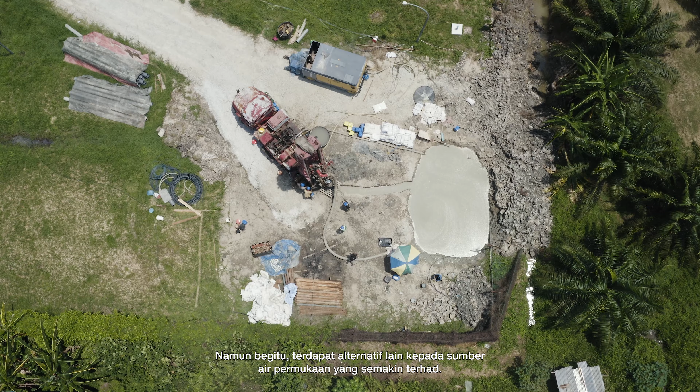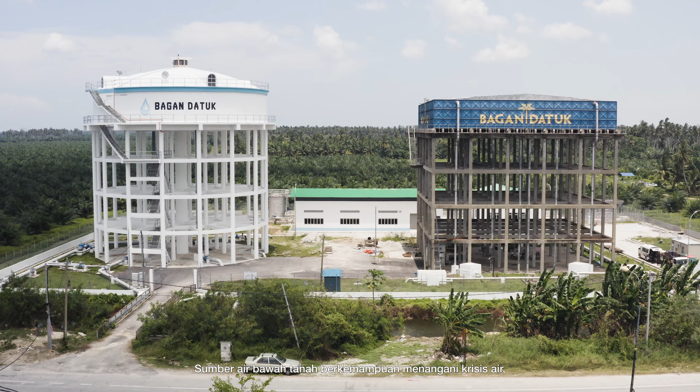There is, however, another viable alternative to surface water resources, and it may offer a practical solution for the supply of fresh water. Groundwater resources have the capability of addressing the water crisis, particularly for remote areas and close to the sea, where access to surface water sources may be economically and physically unfeasible.

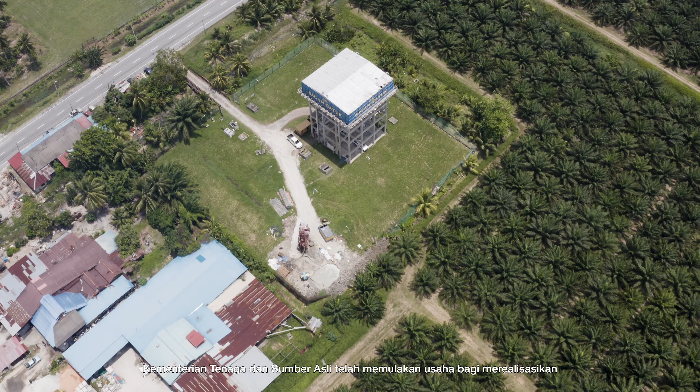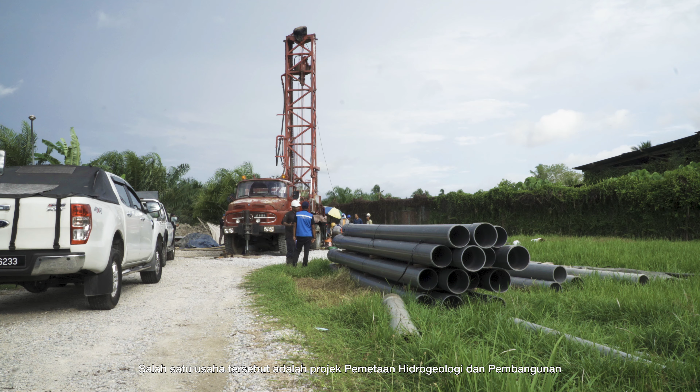Realizing that a comprehensive action plan would be needed to tackle this critical issue, the Ministry of Energy and Natural Resources embarked on a project to fully realize the potential of groundwater resources in selected states within Malaysia. One such endeavor is the Hydrogeology Mapping and Development of Groundwater Resources, or PAT project in the state of Perak.

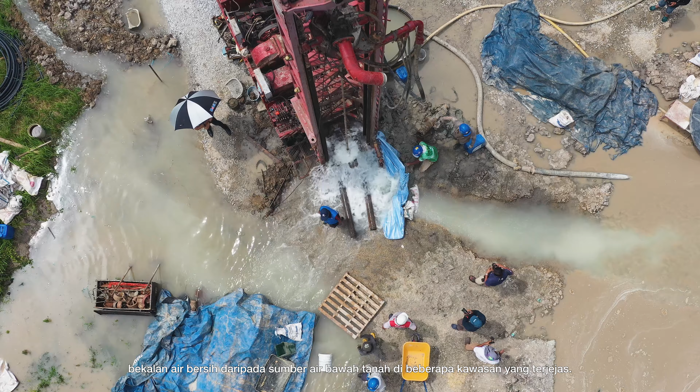Spearheaded by the Department of Mineral and Geoscience Malaysia Perak under the activity of hydrogeology of the Geoscience Unit, this project outlines the necessary strategies and steps in ensuring clean fresh water supply from groundwater resources in identified affected areas. This is the story of that journey.

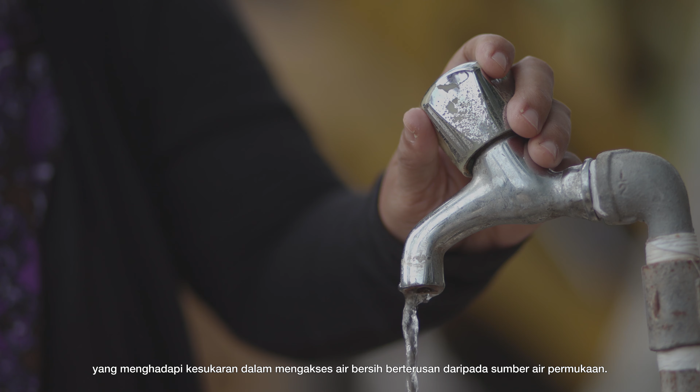As development and repurposing of natural resources expand over time, surface water sources have been depleting, while demand for treated fresh water has been steadily increasing. While Malaysia is blessed with an abundance of water resources, there are still some areas within the nation that have faced difficulties in accessibility to uninterrupted fresh water supply gleaned from surface water resources.

We do need to be prepared and not be overly dependent on surface water resources. We have seen disruptions to water supply due to contamination of our surface water resources. While we try to educate the nation in understanding the need to conserve and preserve water consumption, we need a contingency plan if and when we are faced with a large-scale water crisis.

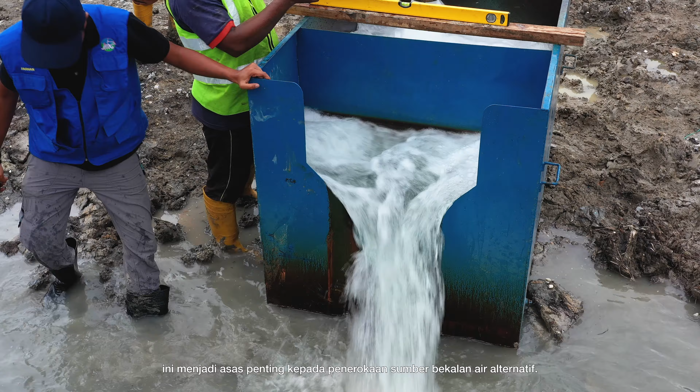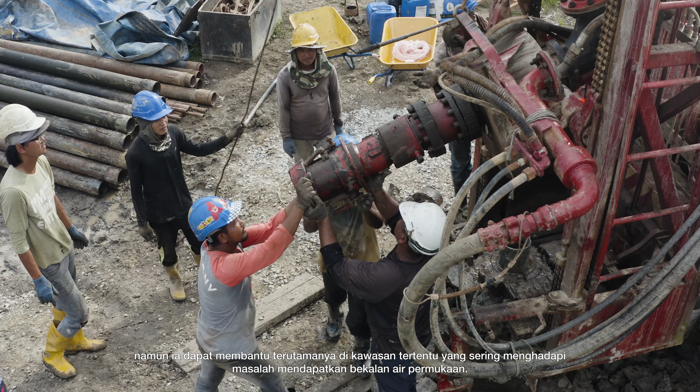Given the fact that in the year 2017, Malaysia has approximately 5 trillion cubic meters of groundwater resources, it makes perfect sense to delve into this alternate source of water supply. While the development of groundwater resources may never supplant surface water resources, it can very well be a supplement to the main water supply, especially in certain areas where the supply of water from surface resources may be intermittent and problematic.

Groundwater is less susceptible to contamination by pollutants, unlike surface water resources. Coupled with the fact that there are areas here in Perak that have inadequate or unreliable surface water resources, it is high time that the groundwater resources be fully tapped.

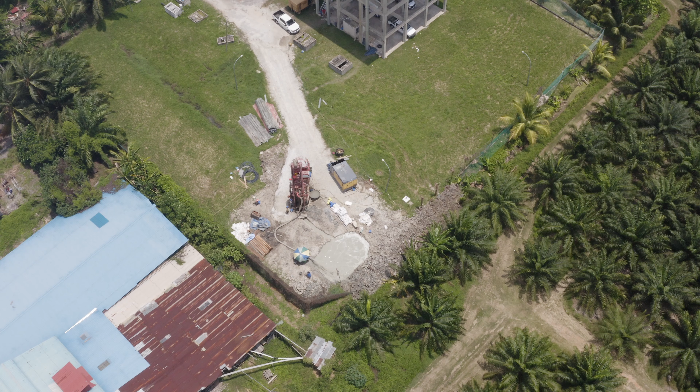Groundwater resources are a feasible alternative water supply source in remote areas, localities where there is no treated water supply, areas with frequent water disruptions, new settlement areas, and areas which are prone to peat fires. Groundwater is also suitable as a stopgap supply during emergencies and may be utilized for agriculture, aquaculture, and industrial purposes.

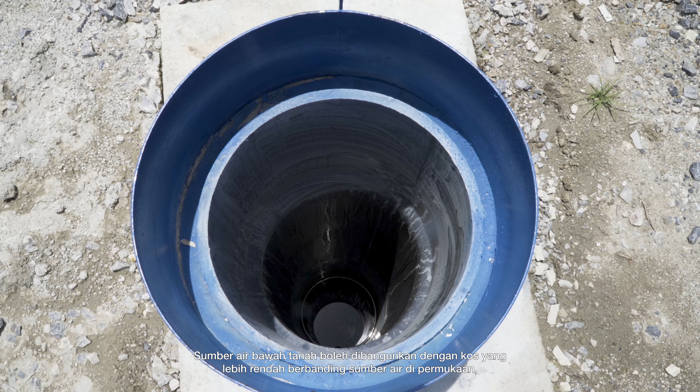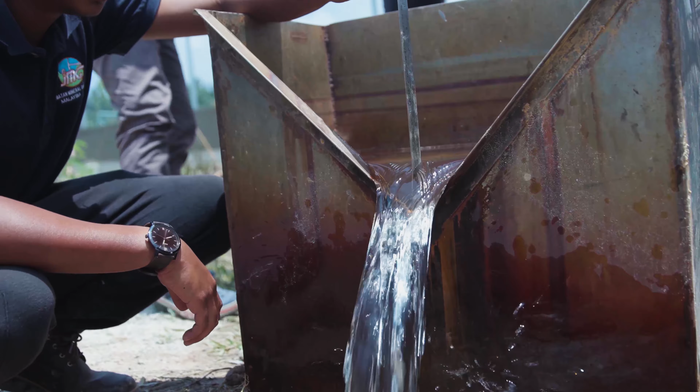Groundwater resources can be developed at a relatively lower cost than surface water resources, especially when developed in a strategic and localized small scale. It is with this aim in mind that the Department of Mineral and Geoscience Malaysia embarked on a strategic action plan focused in the state of Perak, particularly within the district of Bagan Datuk, where the perennial issues of low water pressure and peak time water shortages have become a bane that needed both intervention and sustained mitigation.

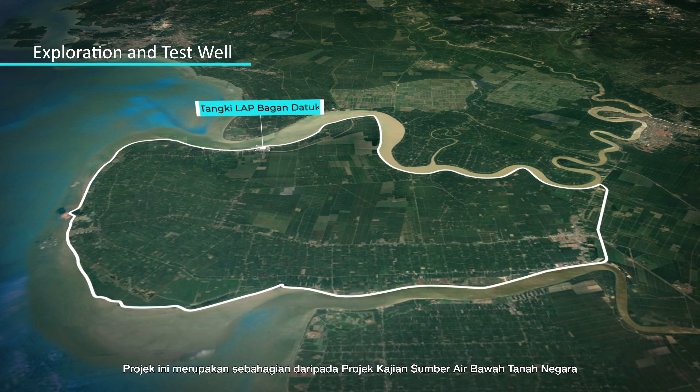Addressing the issue at hand and identifying the problem as well as the panacea, the Department of Mineral and Geoscience Malaysia drafted the Hydrogeology Mapping and Development of Groundwater Resources in Perak proposal, tabled and subsequently approved with a project budget of 12.5 million ringgit under the 11th Malaysia Plan. This project is part of and a sub-project of the National Groundwater Resources Study Project under the auspices of the Ministry of Energy and Natural Resources.

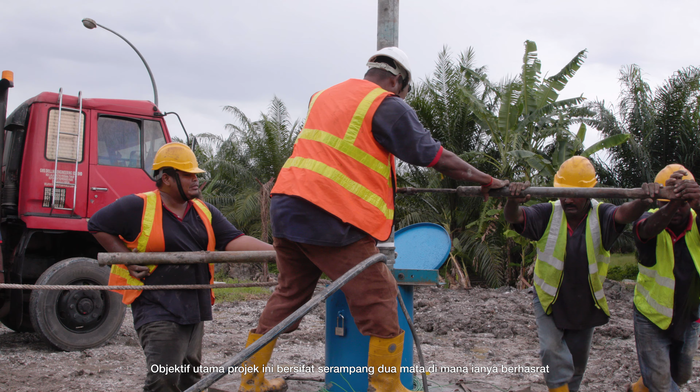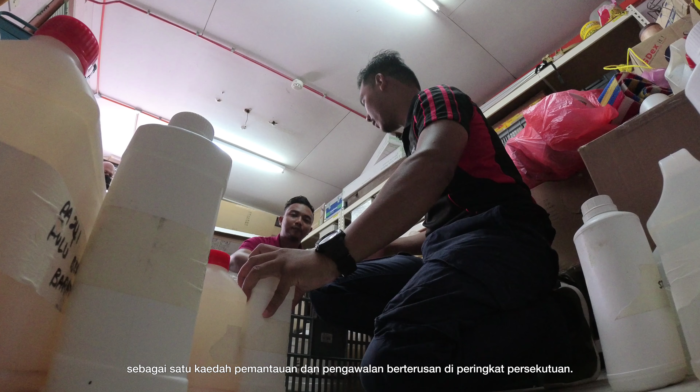The overarching objective of this project is two-pronged, where it was the intention to innovatively provide immediate clean water supply to problematic areas, especially within Bagan Datuk, and subsequently update the National Groundwater Resource Inventory as a means of perpetual monitoring and controlling measures at the federal level.

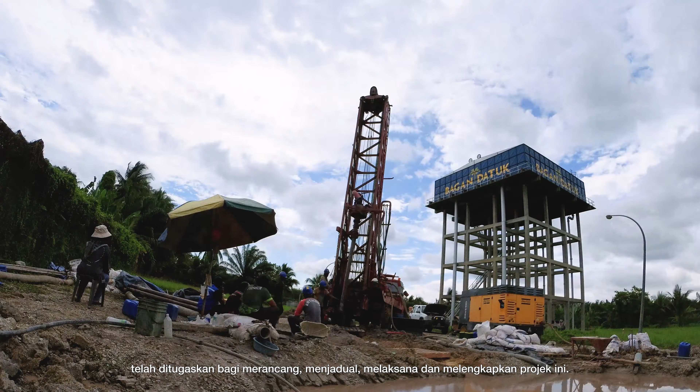The hydrogeology activities under the Geoscience Unit at the Department of Mineral and Geoscience Malaysia Perak was tasked with the planning, scheduling, execution and completion of this project. The scope of the project entailed hydrogeology mapping studies in establishing baseline parameters and the hydrogeological properties of groundwater aquifer systems within the identified problem areas of Bagan Datuk, Rungkup, Selekoh, Teluk Baru and Hutan Melintang in the state of Perak, incorporating geophysical approaches in determining groundwater potential in the Bagan Datuk district,

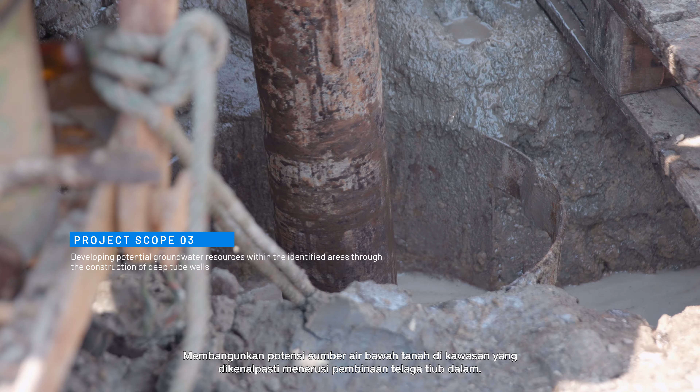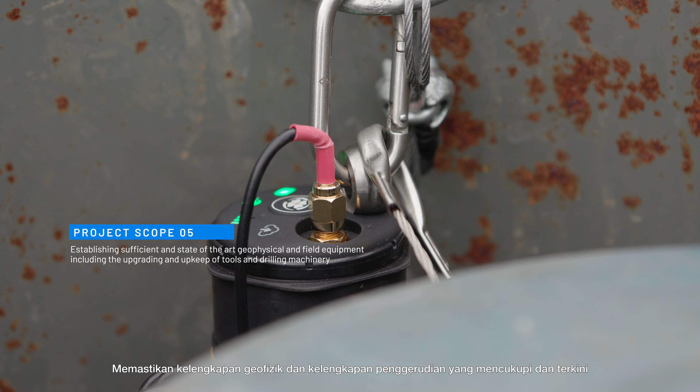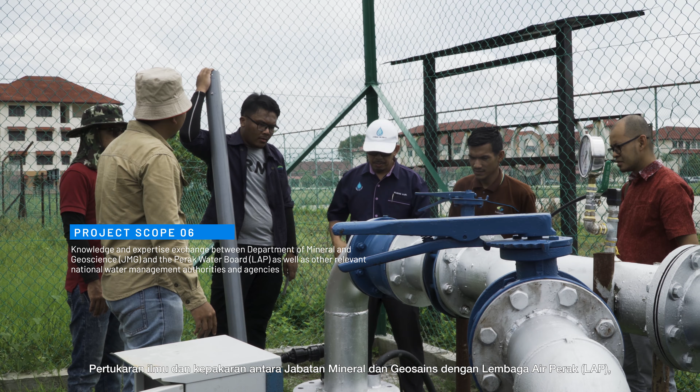developing potential groundwater resources within the identified areas through the construction of deep tube wells, infusing the use of project management practices as well as information and communication technology, ICT, to establish effective hydrogeological mapping data storage, management and processing systems, establishing sufficient and state-of-the-art geophysical and field equipment, including the upgrading and upkeep of tools and drilling machinery. Knowledge and expertise exchange between the Department of Mineral and Geoscience and the Perak Water Board LAP, as well as other relevant national water management authorities and agencies.

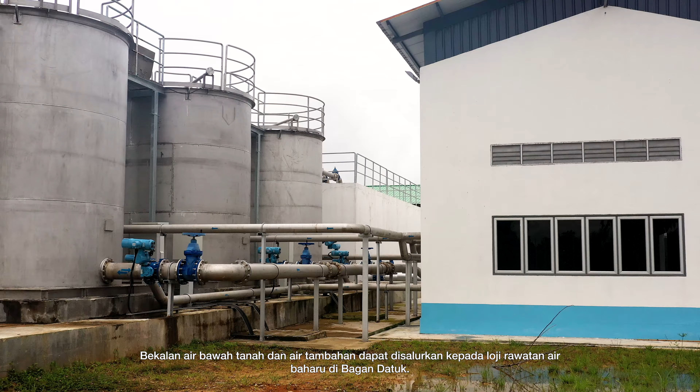Armed with financial support of the government and a clear project premise, this undertaking hopes to ensure groundwater and additional water supply to new water treatment plants in Bagan Datuk, increase in water pressure capacities in affected areas by virtue of water supply from deep tube wells, undisrupted clean water supply to 70,000 end users during drought seasons and peak usage during festivities. This project utilized all the expertise of our departments in identifying affected areas, establishing both the potential and capacity of groundwater resources by way of hydrogeological measure, and more importantly, ensuring a sustained and uninterrupted supply of water to those who are in dire need.

In order to ensure the groundwater exploration meets the requirement and its standard, proper and systematic planning is a major key to execute the exploration process. The groundwork, which involves the desktop fact-finding and data collection, is most crucial. We had to do in-depth research on the initial data of topography, geology, hydrogeology information, and access and facility of the research area. Groundwater exploration is a very unique process. The success in groundwater targeting lies in experience of understanding the geological conditions, structural conditions, and hydrogeological conditions which favor the occurrence of groundwater.

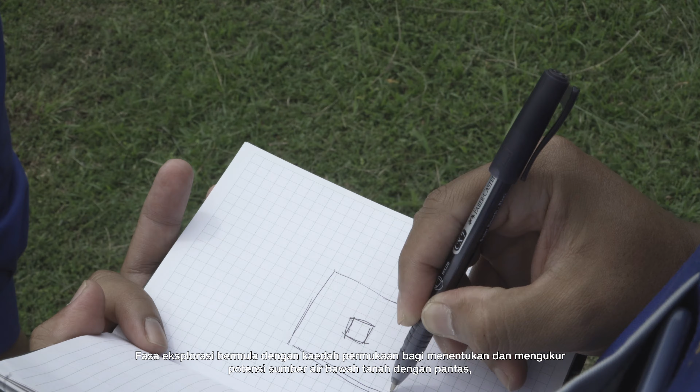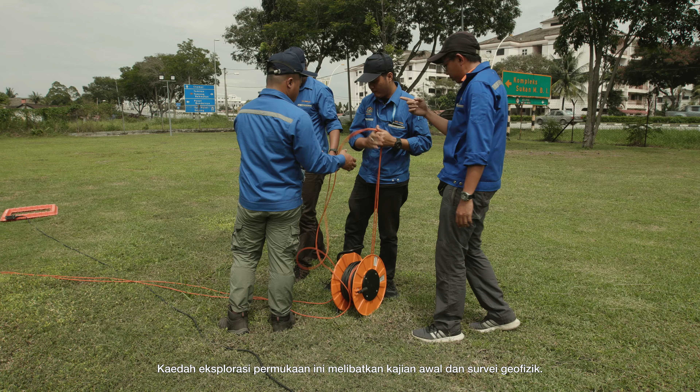As it is a hidden resource, it requires techniques classified as surface exploration and subsurface exploration methods. These methods are employed to target the groundwater potential zones. Identifying the location of its availability is a challenging task for the hydrogeologist, which requires basic understanding of its position in the subsurface geological setup. The exploration phase began with surface methods, which determine and gauge the potential of groundwater at a fast speed, covering a large area with a cost-saving solution. These surface explorations involve preliminary research investigation and geophysics survey.

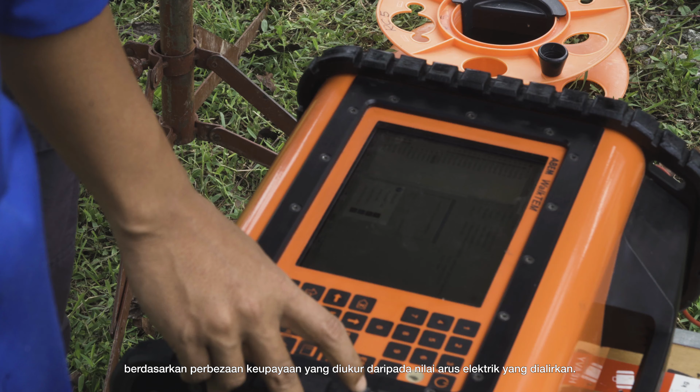The geophysics surveys carried out in this project are two-dimension electrical resistivity and transient electromagnetic method. The two-dimension electrical resistivity involves measuring the resistivity value of soil and earth material based on potential difference measured and value of flowing electrical current, while the transient electromagnetic method measures the conductivity of differently layered materials. Once the surface methods identified that there will be an adequate quantity of good quality groundwater, the drilling process takes place.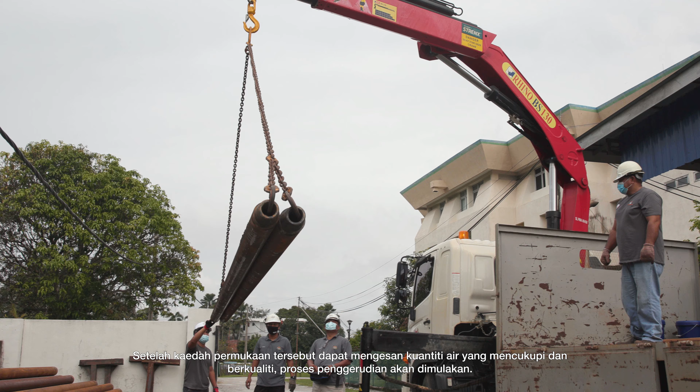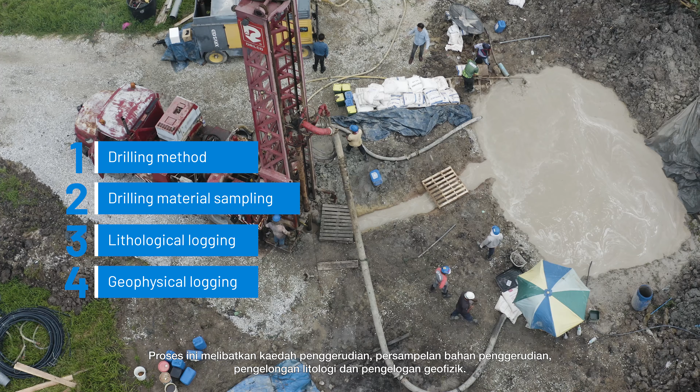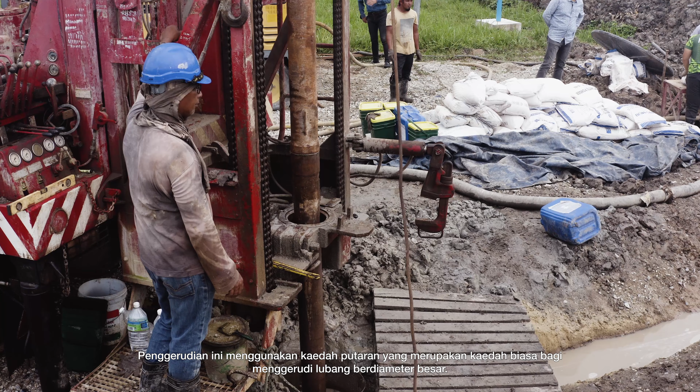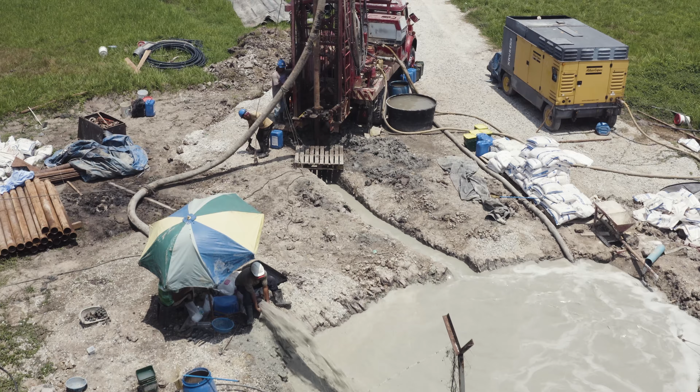This process involves drilling method, drilling material sampling, lithological logging, and geophysical logging. In this project, the deep drilling method is used. This method can achieve hundreds of meters of depth in large diameters. This drilling uses rotary methods, which are the common drilling techniques used to drill large diameter holes. The drilling techniques used in this method are mud rotary and reverse circulation. Mud rotary uses drilling mud that lifts pieces of cut samples upwards while halting the drilling hole from collapsing and cooling the drill bit itself. This technique is best used on unconsolidated layers.

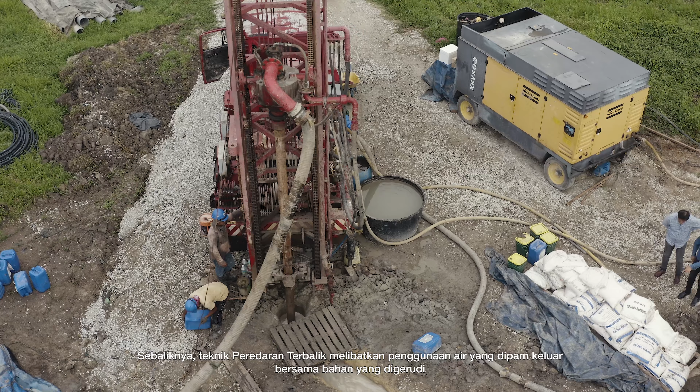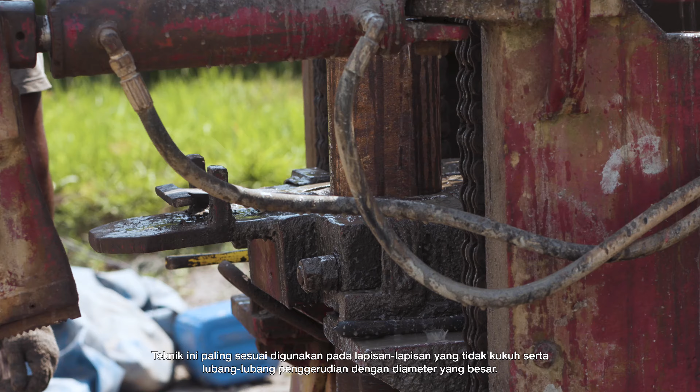On the other hand, the reverse circulation technique involves the usage of water being pumped upwards alongside the drill materials through the drilling pipe and then discharged into pits. Water and drilling mud inside the pit will then be put back into the drilling hole. Water level in the drilling hole and the pits must always be at the same level. This technique is best used on unconsolidated layers and drilling holes of large diameter. This operation requires a significant amount of water.

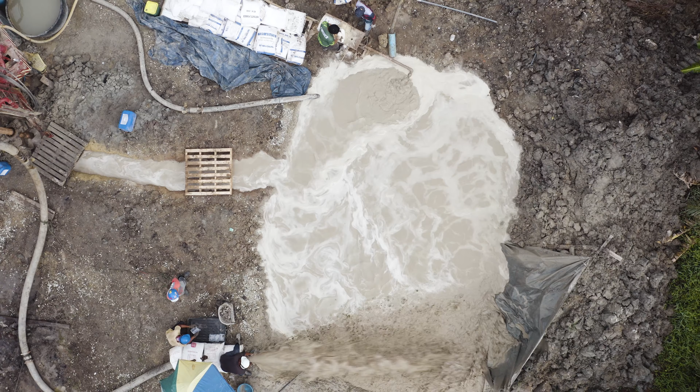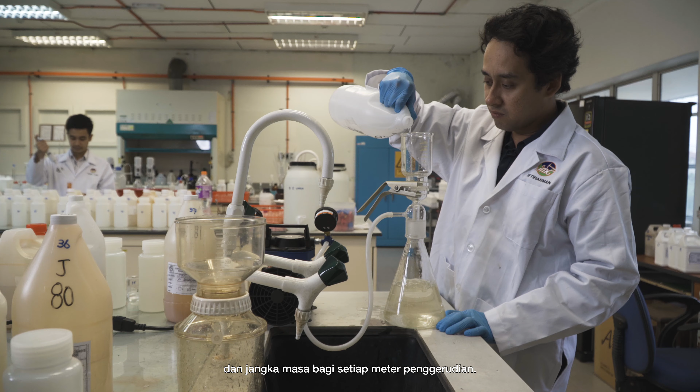To obtain samples that reasonably represent subsurface conditions over the entire project site, drill material samples must be gathered for each change in lithology, when there is a sample change, fluid color, and time period every meter of drilling. Basic information that must be recorded are material type, color, size, and shape.

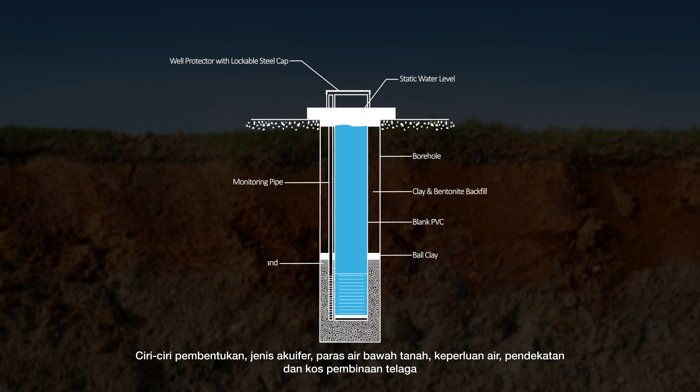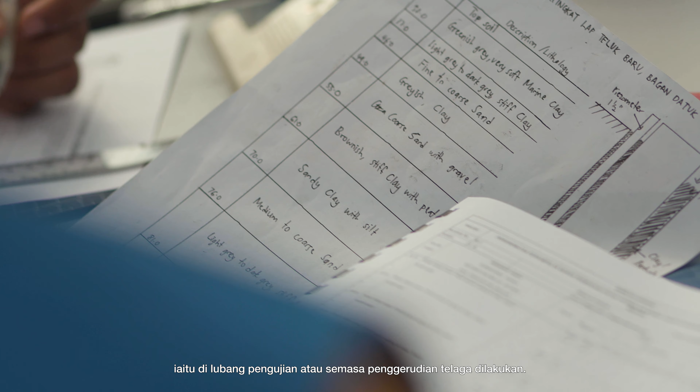Wells are designed and constructed by determining the casing and screen position, gravel, bentonite plug, and backfill quantity. Formation characteristics, aquifer type, groundwater level, water needs, approach and cost of building the well are the factors that have to be taken into account when designing a well. However, the final design is subject to site-specific observations made in the test hole or during the well drilling.

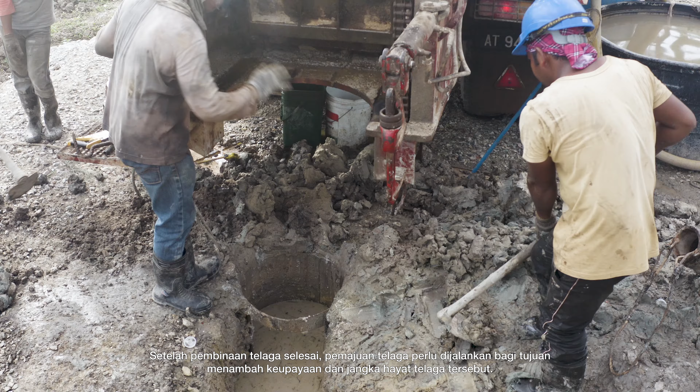In order to do this, the hydrogeological assessment to determine whether and where to locate a well should always be done by a knowledgeable driller or professional geologist. Well development has to be conducted after well construction is done to add features and lifespan of the well. It involves the process of extracting out foreign particles in the well using techniques such as air surging and pumping.

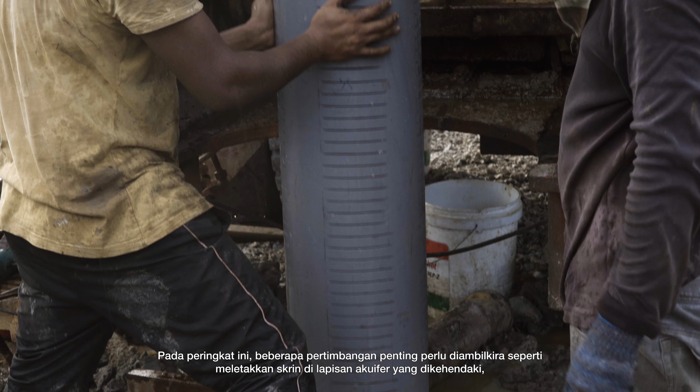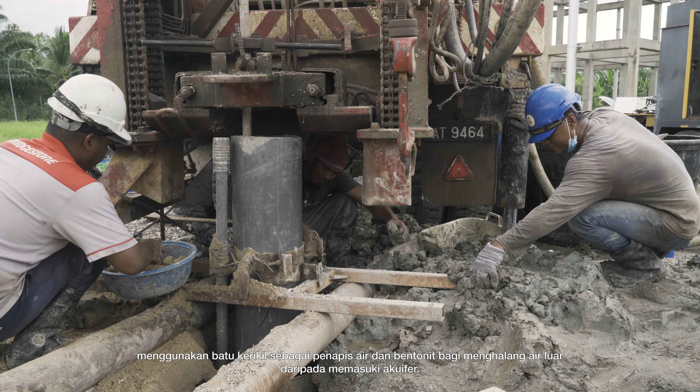At this stage, the placement of the screen near the desired aquifer, the function of gravel as a water filter, and the use of bentonite to prevent foreign water from entering the aquifer are vital considerations to be made. Throughout the well development, the main techniques that were used are air surging and pumping.

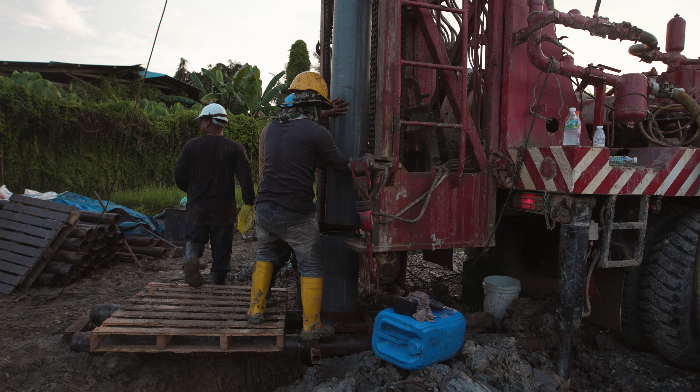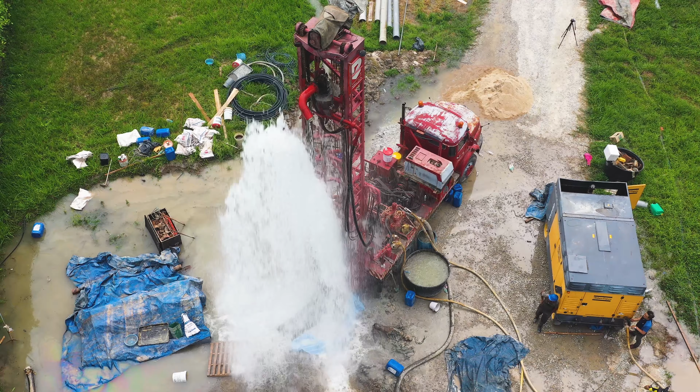The air surging process involves streaming compressed air into the well in an immediate swift manner to achieve a strong surging effect. This results in the foreign particles being ejected from the well until the water becomes clear and free of contaminants. Once the well is completed and developed, a good practice is to conduct a pumping test.

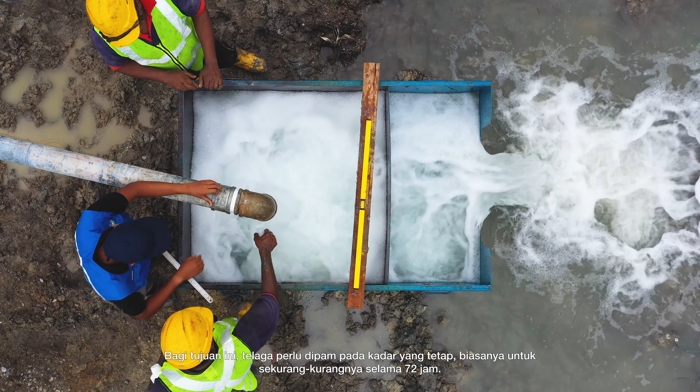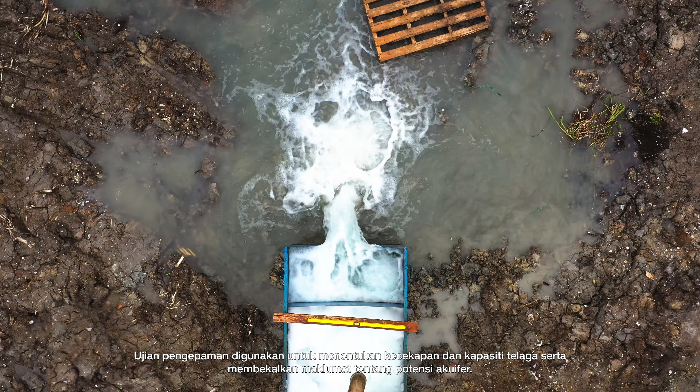For this purpose, the well is pumped at a constant rate, typically for 72 hours or more. At this stage, the water levels in the well are checked and recorded frequently. Pumping tests are used to determine the efficiency and capacity of the well and to provide information about the aquifer potential.

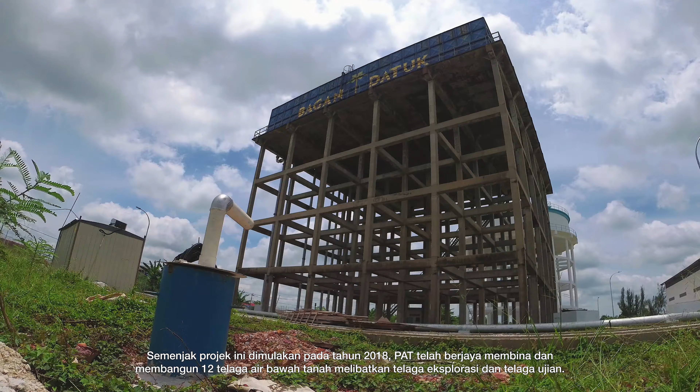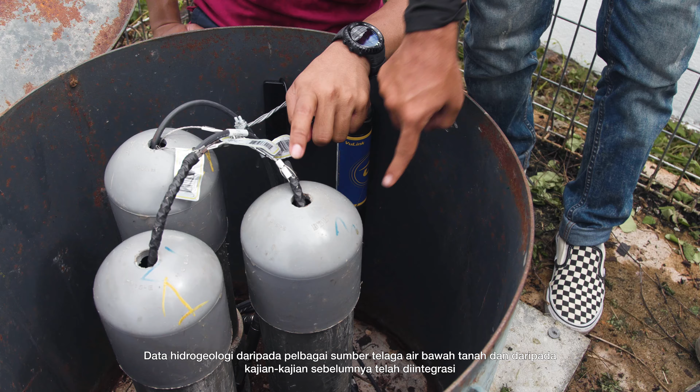Since the project was initiated in 2018 until now, PAT has successfully built and developed 12 groundwater wells comprising exploration wells and test wells. Hydrogeological data from different sources of groundwater wells and previous studies were integrated to develop a groundwater model for Bagan Datuk Basin. Initially, a conceptual design was developed, followed by constructing a 3D geological and 3D hydrogeological numerical design.

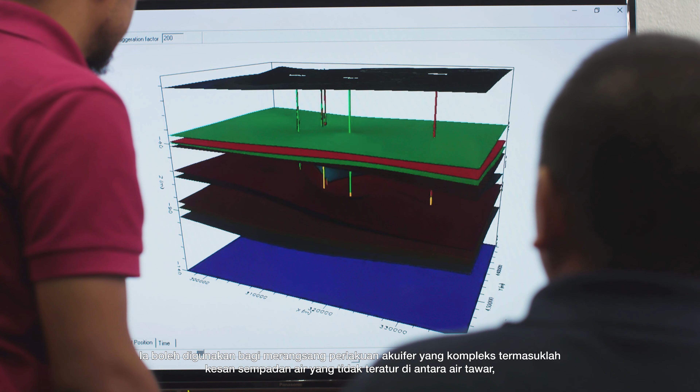Groundwater modeling is a tool that can help to analyze many groundwater problems. It can be used to simulate the behavior of complex aquifers, including the effects of irregular boundaries of fresh, brackish and salt water based on geological input and safe abstraction rate.

The construction of the water supply system for Bagan Datuk through the groundwater treatment plant, which has a capacity of 5 million litres a day, by the Perak Water Board LAP in 2019, has seen continuous efforts to ensure the prosperity of Bagan Datuk citizens.

The innovations developed by the Department of Mineral and Geoscience Malaysia Perak, alongside the service provided by the Standard and Industrial Research Institute of Malaysia SIRIM, to supply and install the water treatment system for underground brackish water at Sekolah Menengah Sains Teluk Intan Semesti is a success in treating brackish groundwater into fresh, clean water. The Ayak Nano can supply around 5,000 litres of clean water daily to support the alternative needs of the school.

This water station really helped the students overcome their water supply problem, in which they use the water for drinking purposes, and the dining hall uses it for cooking purposes.

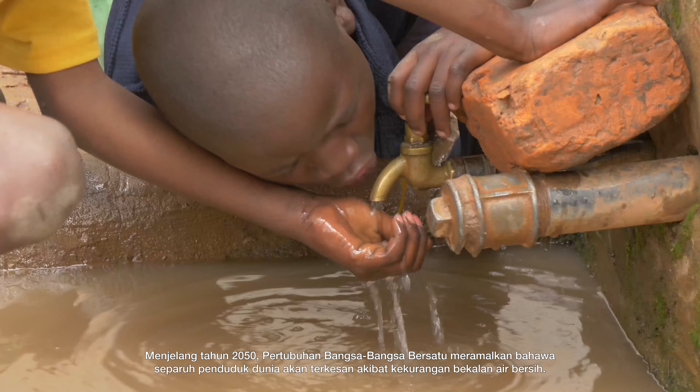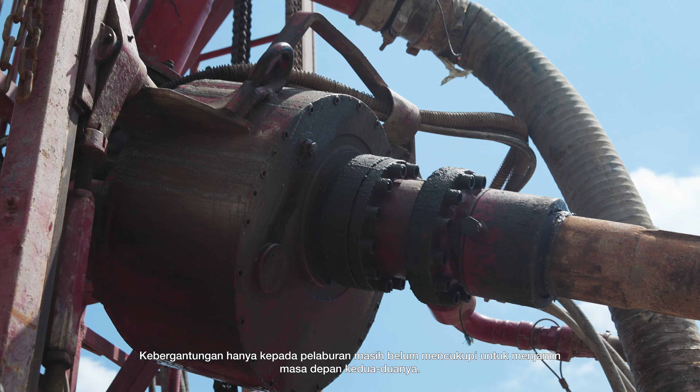By 2050, the United Nations predicts that around half the world's population will suffer from clean water scarcity. Our future and the future of the water we use are inextricably linked. Securing them both will require more than just investment. The imagination of groundwater sources that people have, the technologies that have developed in well exploration, and the will to solve this problem is something that we need to further study.

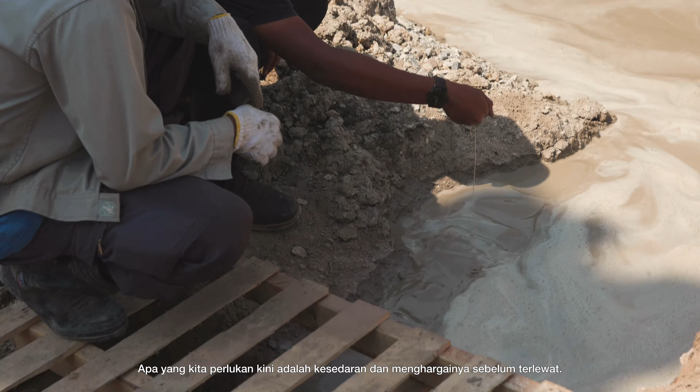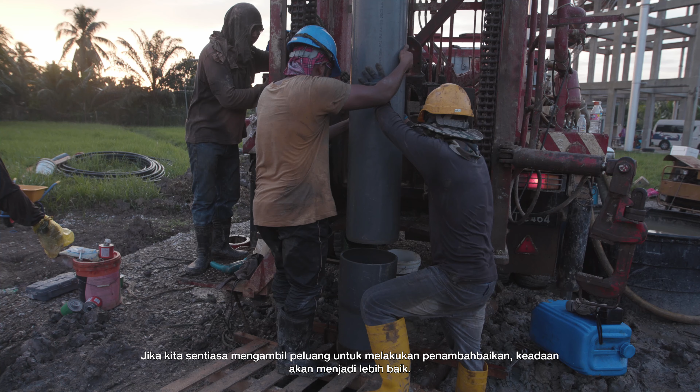What we need is awareness and a new respect for a precious resource we've taken for granted far too long. If we continuously see the opportunity to improve, we are going to move to a better place. The success story of the hydrogeological mapping and development of groundwater resources in Perak should not be the end. Yet, a huge opportunity is waiting to be expanded and explored. The journey must continue.